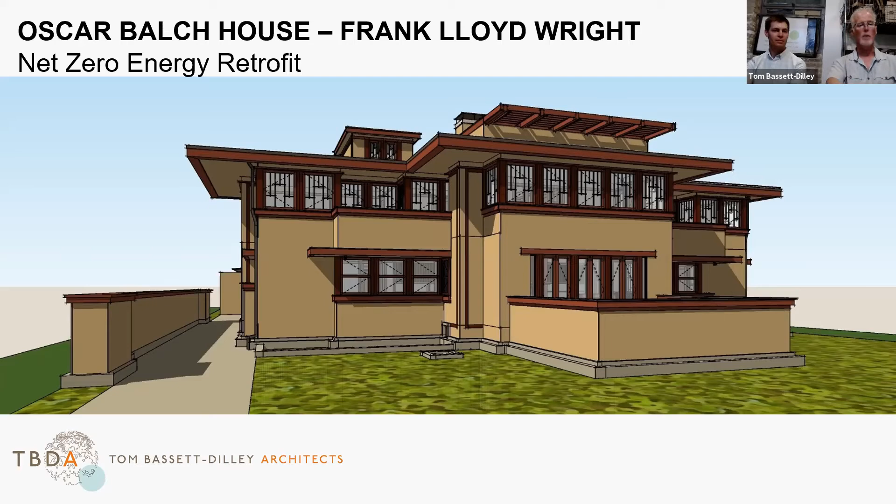We started with existing documentation that we could get from the previous owners, and it was kind of out there in the world. And it's always wonderful to look at the old drawings and see what Frank Lloyd Wright was thinking about, what was drawn. And the house, as you can see, is quite a long house stretched facing the east and west.

So the south that we normally like to stretch to is the short side of the house. And what you're not seeing in this is on that floor plan, the upper right, there's a family room addition that was added in the 2000s. Correct me if I'm wrong there, Doug.

But as we look through the detailed drawings, we can see there's no insulation. You can see that overhang detail on the right-hand drawing. The top left corner of the right-hand drawing is the roof overhang. There's basically a thermal bridge and an airtightness problem drawn into the working drawings. And so, these were not that uncommon. They didn't have capillary breaks. They didn't have dense packed cellulose insulation or spray foam, et cetera.

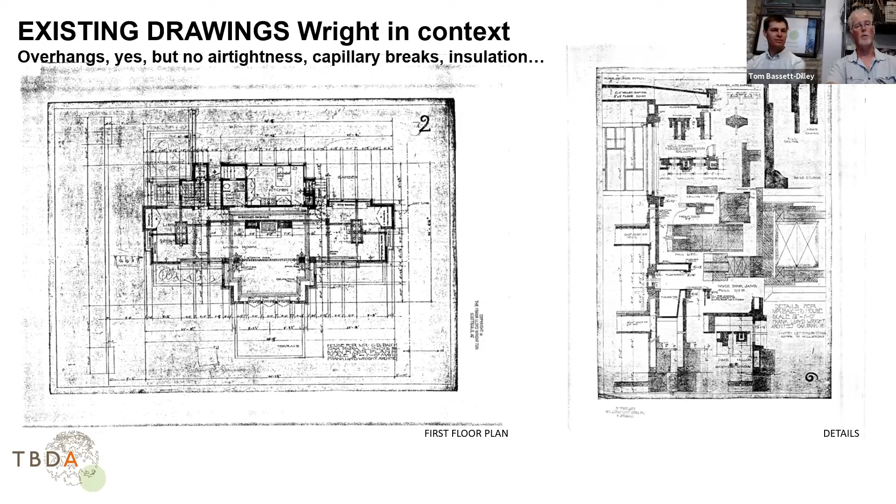So this is what we're inheriting. And we have to think about how we're going to handle that and handle it in a way that the building will be left better when we're done, not worse. So when we look at historic preservation, the backbone to that, or the starting point, is the Secretary of the Interior Standards for Rehabilitation. There's a screenshot here. They have an illustrated guideline.

And the fundamental principles are keep all the original material. You can't say, oh, I'll just throw that thing out and replace it with something that looks the same. We really want to keep the actual original material. And sometimes we can and sometimes we can't. But if you can't keep it, you need to replace it in kind. So if you're tearing off a plaster ceiling, replace it with a plaster ceiling. Don't replace it with 5/8 drywall and just paint it.

The other principle is reversibility, so that if somebody comes in and says, I really want to turn this into a museum and have it be just what was originally here, then the things that we did should be able to be removed without damaging what was there.

The interior and exterior purview actually should be a bullet point on the next thing, which is the tax assessment freeze. So we're pursuing a tax assessment freeze on this project, which means that the tax assessment level is going to be held at the pre-renovation value of the house for 10 years, and then it ramps up for 2 more years after that, if you spend at least 25% of the project's market value, which we're definitely doing. So those are sort of the preservation backgrounds.

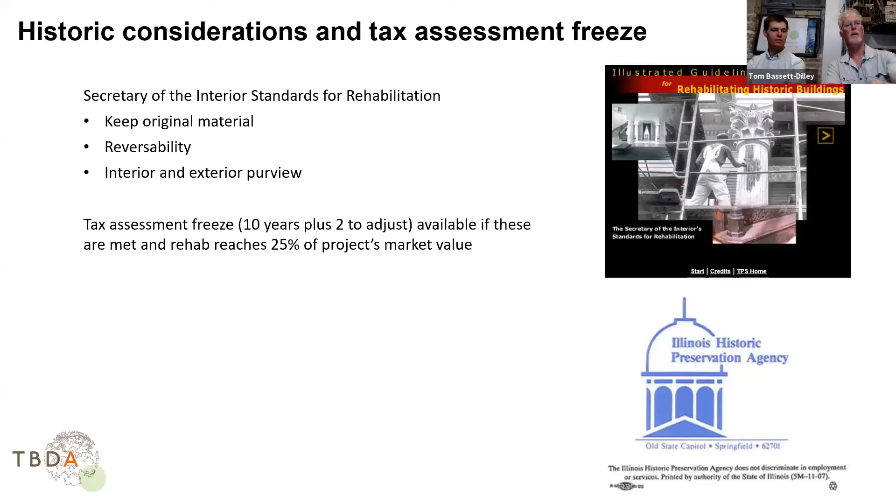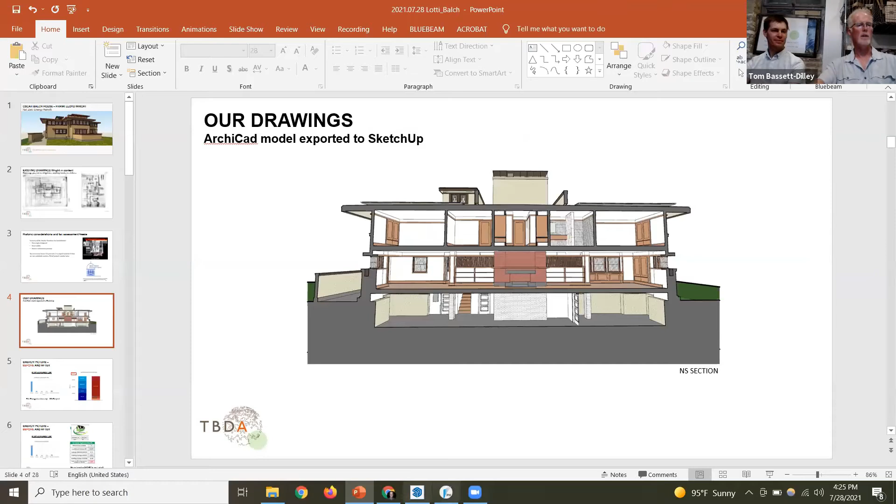We always start renovation projects with as-built drawings, and so this was like the best as-built exercise to date. It was just so much fun as an architect to go in and just have a good look. I'm going to show you this model. If anybody can't see my SketchUp model, Ashley or somebody, let me know. We draw in Archicad, which is a building information modeling program. And since we can't walk through the house, I can give you a little bit of a walkthrough here and let you see the after that we're going to get to in a couple of years.

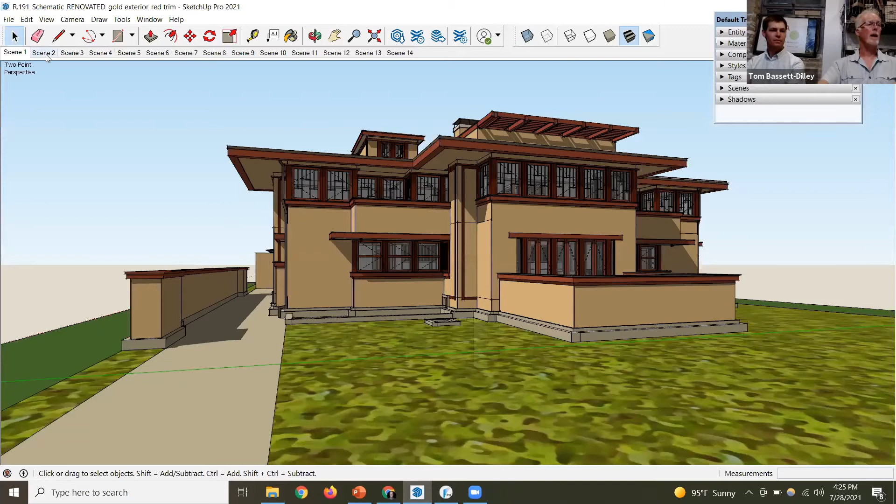You can see we're putting solar on the roof, and as you can see, it's completely not visible from the street. And so that's our renewable energy source. We'll talk more about that later. The front door is a back door on the Balch House. It's this door underneath the overhang here at the back.

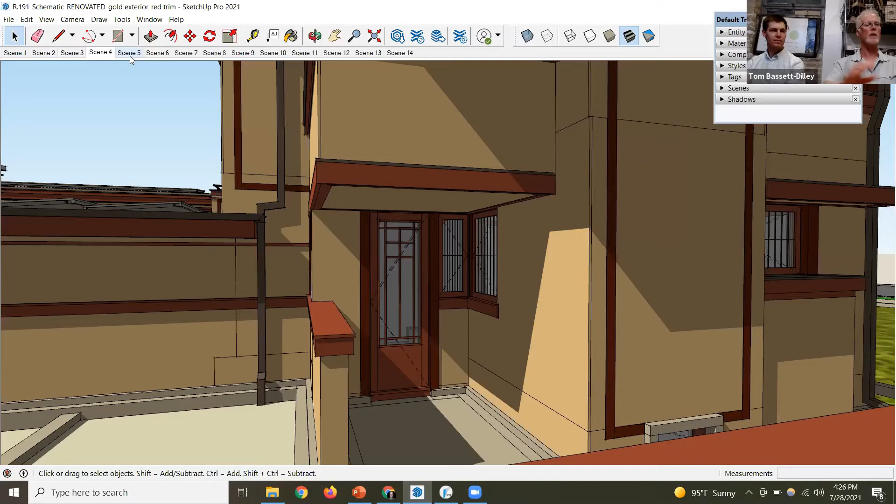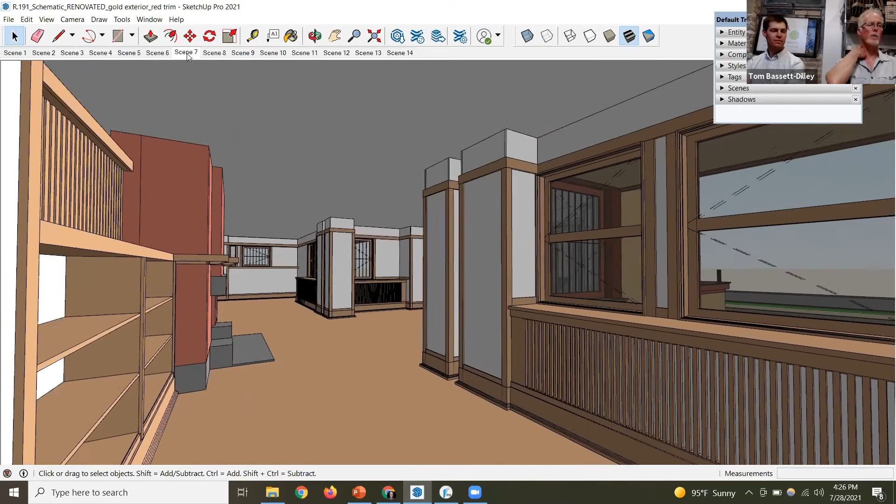It's one of the classic Wright experiences where he choreographs this experience where you have to come in through a mysterious passageway and enter behind the hearth or adjacent to the hearth, which is the heart of the home. It's the anchor, and it's going to be an experience getting there. Oops, I jumped a scene. Sorry. So here we are in this little compressed entryway, and then we come up into the house, and here we are. So this is the big space facing east, and it's a great room, and it's a connected sort of library at our back.

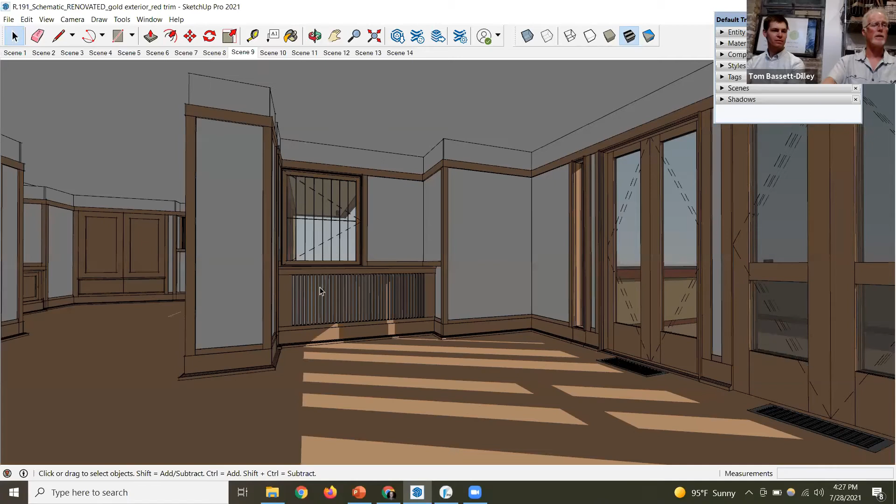Living room is the alcove off to the right, and in the front to the end is the dining room. Now, one of the things I want to point out, because it's going to become important as we talk about our strategy here for retrofit, is, I'm just going to orbit around here, these radiators that you can see underneath this window, the grills underneath the patio doors, the big radiator here. Heating, and in our case, it's also going to be cooling, is integral to the architecture, okay?

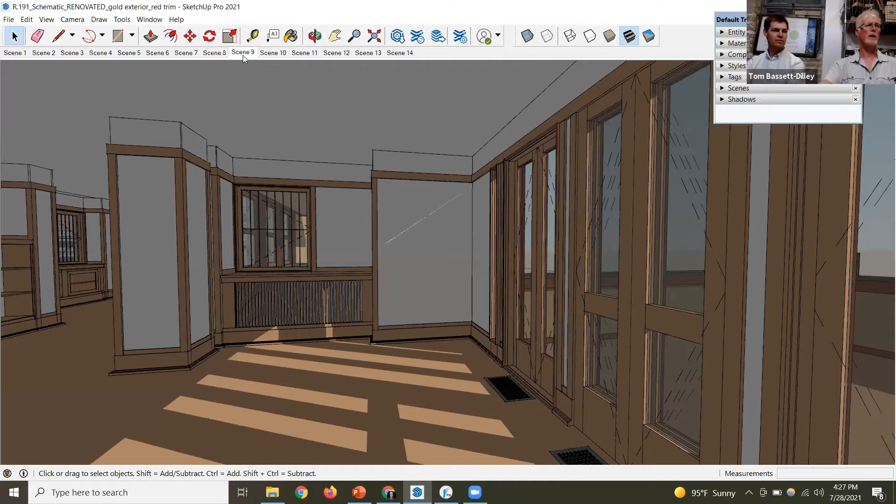And this is something that Wright was, as Samantha said, phenomenally good at. And there's a book that I'm going to recommend later that talks about how he embraced technology and thought about it. And so obviously we have different technology now, but we want to honor his approach as much as we can. I'm going to go up through the floor into the primary bedroom suite.

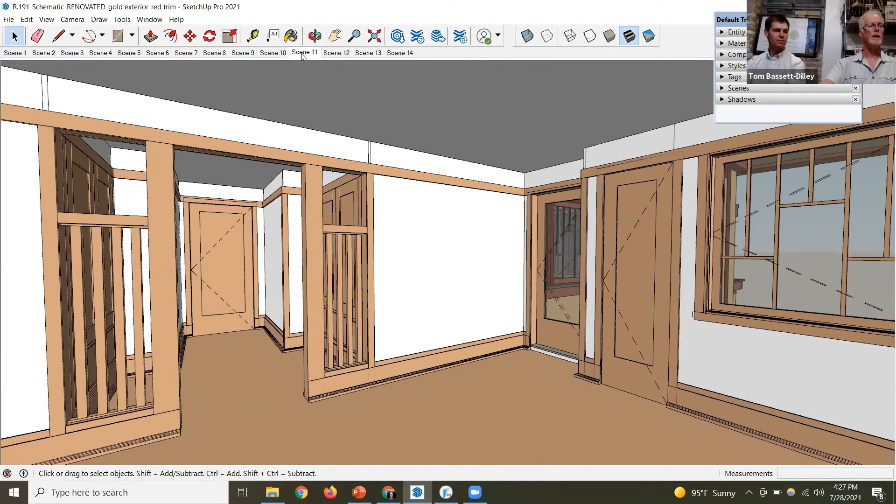Here we are. This has a bank of windows to the east, which are wonderful for view, but Samantha can tell you what it was like during polar vortex with the bed under those windows. Well, how warm could you get the house that winter, Samantha? Was it like 50 something? Yeah, it was 55 was the warmest I could get it during the polar vortex. Yeah. So we're talking about trying to improve the quality of life here by this work we're doing.

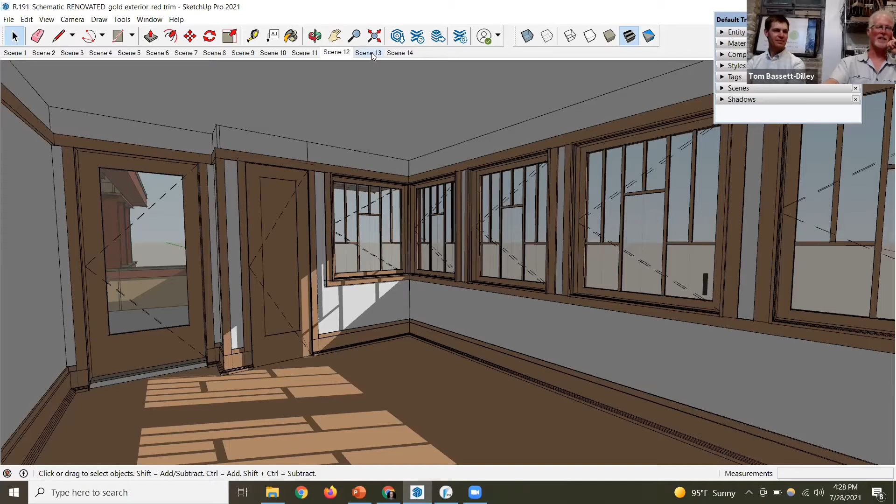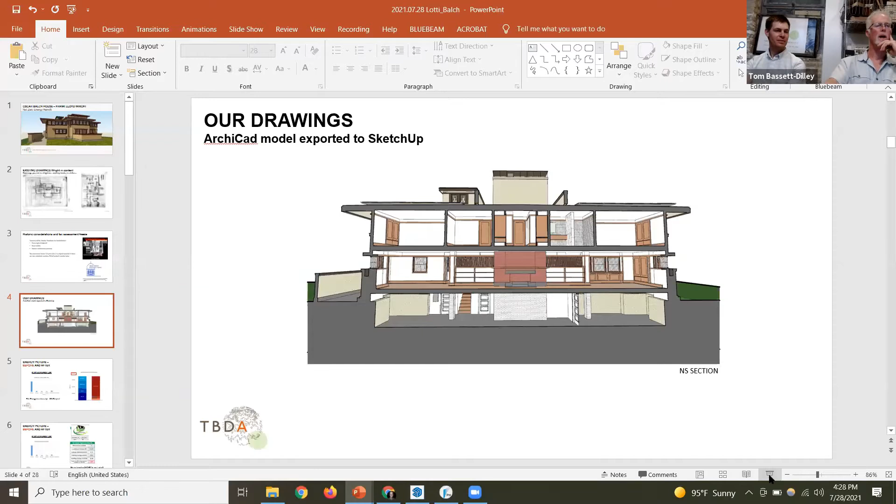So anyway, there's a little tour, digital tour. We can come back to that if we need to. Yeah, so that's kind of our starting point, so that we can start to think about how we're going to attack this from an energy standpoint. And so Mark did an energy model specifically for his thermal demands, especially for sizing the geosystem. And we do one in the same program that we use to do our passive house certification, WUFI Passive, which looks at everything. It looks at electrical, lighting, space cooling, space heating, air tightness, and it all puts it into a program and gives us our energy balance.

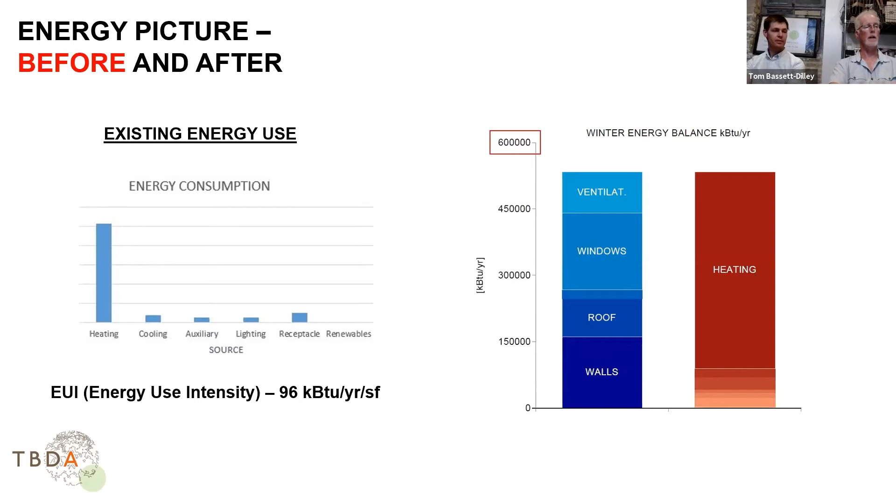So you can see here on the right, the energy balance is like, here's how much heating we need to offset what we're losing through walls, roof, windows, and ventilation in the winter. And in this case, ventilation is just a leaky house. And what you see here is what we see in all of the old houses that are not well insulated, which is that most of the energy is what you're seeing on the left-hand graph. Almost all of the energy is going to heating this building. So what are we going to do? Well, we want to insulate and make it airtight, and that'll make it more comfortable and make the heating system a lot smaller.

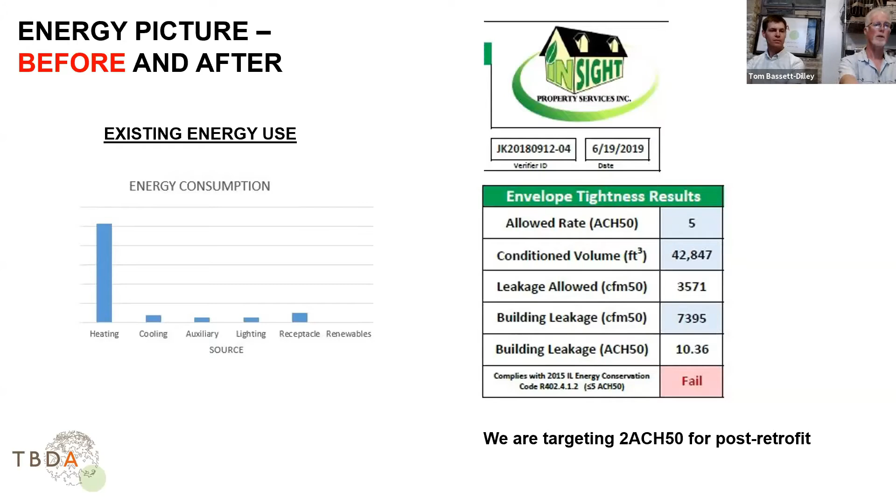We did start with the preliminary blower door. Joe Konopacki came out from Insight and found that we were about 10 air changes per hour when the building was pressurized to 50 pascals, which is a sort of building standard. Passive houses, we want that to be like 1 or below, so 10 times less leaky. And we know that we're not going to get to a passive house level here. We're shooting for 2. If we can get there, that'll be great. If we make it to 3, it's still going to be okay, but we definitely want to prioritize air tightness because it has a lot to do with durability.

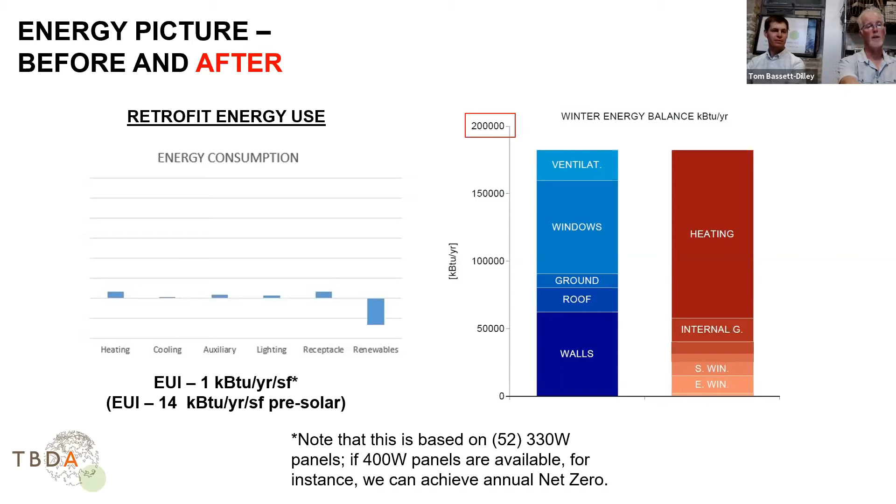Now, when we did our model, we were looking at being able to get 52 PV panels on the roof at 330 watts per panel. Now that watt rating is changing. And if we can get 400 watt panels by the time we put them on in a year or so, we'll easily be at net zero. Right now, we're almost at net zero. We're at an EUI, which is energy use intensity, of 1. A net zero building is EUI of 0. And so we're coming from 96 down to 1, which is a pretty good factor. But we want to go from 96 to 0. And we can get there either soon or in the future.

Well, how do we get there? As I kind of alluded to, step 1 is conservation. Stop the waste. And that is so basic and simple. It's insulation and air sealing and making it as continuous and thorough as possible. So foundation, walls, roof, windows, we want to address it all. That's step 1. Step 2 then is once you've eliminated a lot of your losses, you go to looking at efficient systems. So get an efficient mechanical system for heating and cooling and domestic hot water. Those are the biggies. And then get efficient with your appliances. Swap out your gas cooktop and dryer for electric units, induction cooktop and a heat pump condensing dryer.

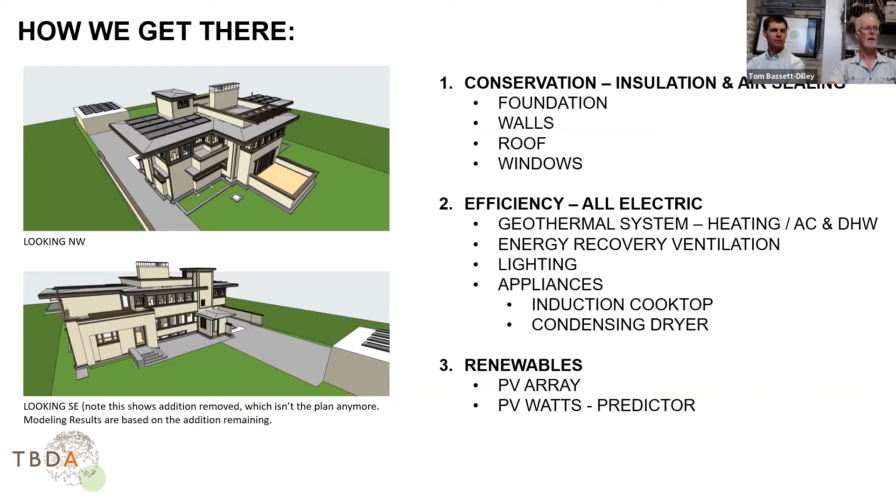And then you've got your energy balance, your energy diet, and then you put on solar to offset it. So that's the steps. Sounds simple. How did we do it? So I want to kind of walk through the retrofit assemblies, and when we get to the mechanical, we'll get Mark talking more about his strategies here.

So this is our foundation condition. It's a rubble wall foundation, big thick wall, and as I said, there are no capillary breaks in early 1900s construction. And what is a capillary break? Well, it's a film, like a waterproof membrane or a sheet of plastic, that keeps the moisture from the earth from wicking into the building. We use those all the time now, vapor barriers underneath the slab, but back in 1911, they didn't have them. So what we've got is moisture coming up into the building, and we've got to think about that in addition to the heat loss.

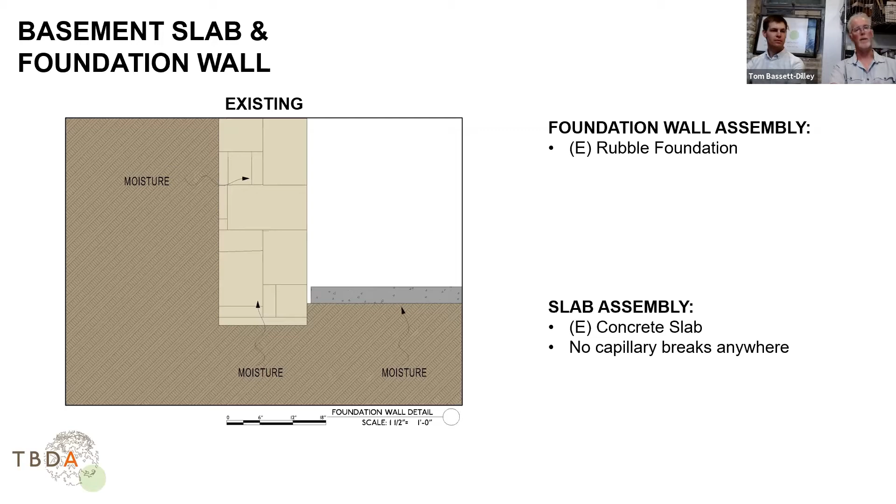So our plan for the basement is to take out the slab, get some EPS insulation underneath that slab. That's a white styrofoam. Get a vapor barrier on top of it and put a new slab down. And Denny pointed out, as we were previewing it today, that we should be showing a little thermal break between that slab and the foundation wall. We don't want to touch warm slab to cold wall. So that will be going in. When we do that, we can put a new perimeter drain to the interior, take it to a sump, make sure that things remain dry.

Moving up from the slab, we put a dimpled membrane against that kind of wavy wall. On a building where we're not being so concerned about historic, we might just spray foam that. If you look at Building Science Corporation, what Joe Lstiburek did in his old house where he had rubble wall, he just sprayed it with spray foam. It acts as a capillary break and a thermal break, and it can sit over the wavy surface, not a problem. But that's not reversible so much. So we wanted to do something here that could be reversible.

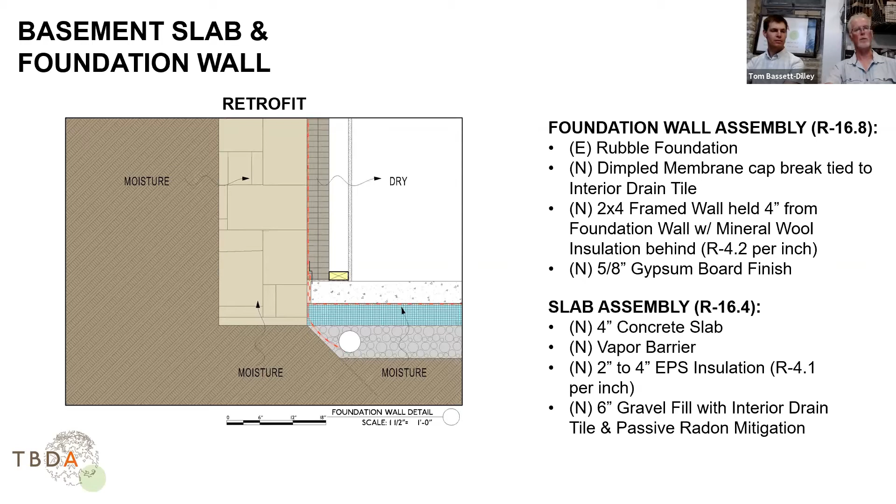So we want to put up the dimpled membrane so that any moisture that does come in can just go down to the perimeter drain, and then put mineral wool batts up against that. So mineral wool can flex a little bit and take the irregularity. We're going to stand a stud wall in front of that, and we can drywall it. So the moisture will be kept out of the building, and we'll have a decent R value. We're cutting down the heat loss through the floor and the walls. So greater comfort as well, even though it's not really a finished basement.

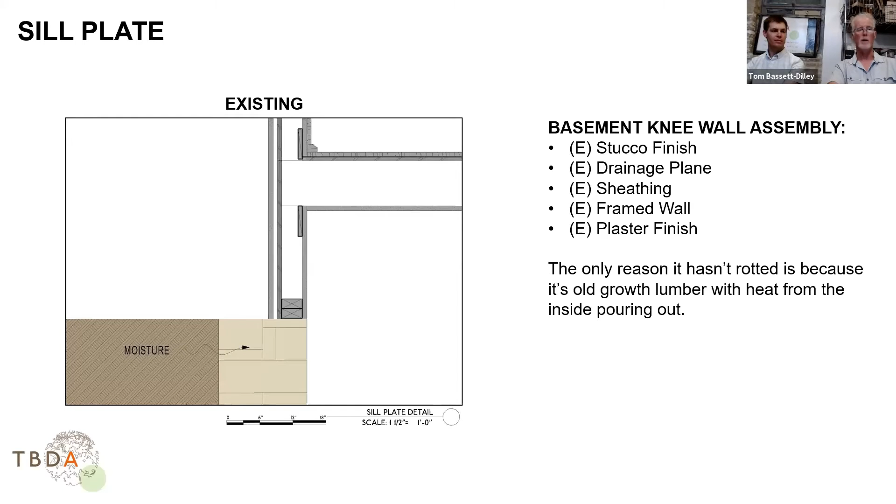Now, when you get to the top of that wall, they just set the studs on the rubble wall. And so moisture that wicks into that foundation just wicks up into the old wood. Well, good news is the old wood was tremendously good quality old growth lumber. And the other thing that was happening in this house over the 110 years is that since it didn't have insulation, you're just pumping heat through the envelope to dry everything out. So this is the conundrum with retrofitting an old building: it's really a wonderful way to preserve a building by just not insulating it, just throwing heat at it, but we can't do that to the environment. So when we start to cool down the exterior surfaces by insulating them, we have to be careful not to let the moisture wreak havoc.

So here, Doug came up with a really ingenious solution that we could remove the existing sill plate in portions, so we don't have to jack up the whole building, and let that dimpled membrane come up and lap over the top of the wall. Well, we actually use a moisture-proof tape there as a capillary break, go underneath the sill plate, which would be a treated sill plate, and then just reconnect the studs to that. So that's our way of keeping the moisture out of the frame.

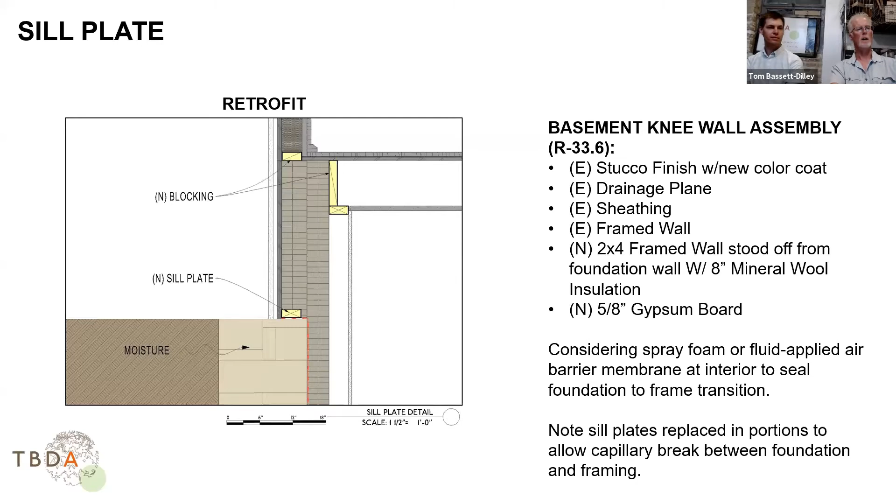So that's coming up down the road. We talked about spray foam here as a way of kind of sealing the rim joist area, which is always a little tricky, and the sort of top of wall. We may think about doing that. It may be the right thing to do. So we have yet to really lock that in, but right now that's not our plan.

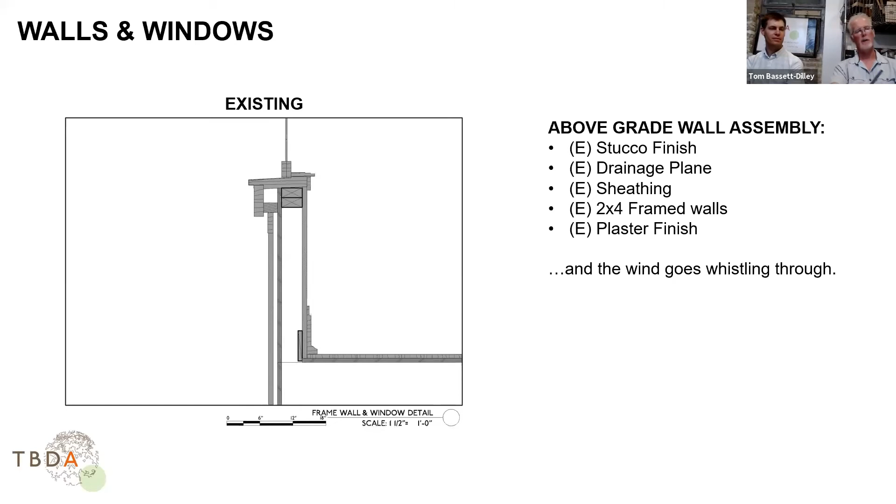Okay, the above grade wall is basically 2x4s with plaster on the inside and stucco on the outside. Single glazed windows. I mean, this is as thin of an assembly as you'll ever want to see in this climate. Well, you don't want to see that in this climate. Nowadays we do 2x6 full of insulation plus outboard insulation. So how do we address this? Well, we want to make it more airtight. We want to insulate it some.

And this is where thinking about the preservation issues and kind of leveraging Doug's expertise really came in. We discovered in looking at some old pieces of plaster on the house that the original stucco actually had a kind of golden finish. And then as we started digging on some of the trims, we found that there was this beautiful red color. So Samantha was all for it. She's like, yeah, great, let's go for it.

And so we said, all right, we're going to recoat the stucco on the outside. So therefore, let's go ahead and take the opportunity to drill holes in the stud bays so we can pump cellulose into the walls and we can get some insulation in there. And then when we patch them and recoat, you won't know that we messed with it.

And that way we don't have to mess with all the interior, because we weren't planning to mess with the plaster finish. So that gives us, you know, a modest R13, but it's a heck of a lot better than a really modest R0. So it'll slow down airflow. It'll give us insulation. It'll help with acoustic control as well.

So the other part of this, of course, is the windows. When we got to the site, we could see, like in that master bedroom, so much condensation on the inside of those single glazed windows just coming down. It was ruining the sills. The sills were becoming destroyed by this moisture, which you couldn't keep out of the house. There's moisture inside the house. It's going to condense on cold glass, and it's going to wreak havoc on your interior finishes. So we knew we needed to get improvement in the windows.

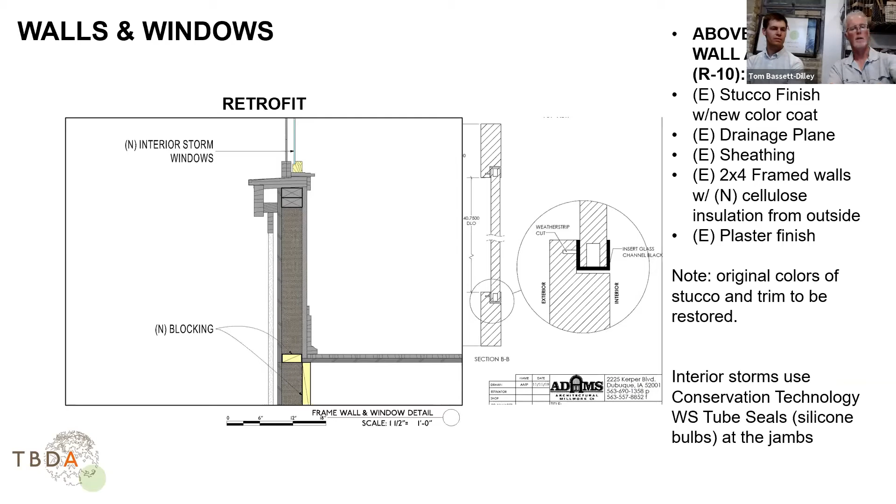We looked at exterior storms, we looked at interior storms, and ultimately we settled on interior storms so that we could let the original art glass read from the outside. Yes, those windows will continue to weather, but we'll have to just keep improving or repairing them as we need to. So we worked with Adams Architectural Millwork. They're an Iowa company, and they make custom storms, and they're terrific. And then Doug's guys, Tom Wilder, the carpenter, just knocked it out of the park.

And then there wasn't a lot of rabbet, R-A-B-B-E-T, the depth of jamb to receive the hinge. So Doug and Tom had to think about mortising those in. But then that silicone gasket really helps us get the airtightness.

Now, one thing that we've really been monitoring is condensation can still happen. There are certain environmental situations where the humidity is really high and the dew point is kind of high, but it's cold outside. So Samantha, would you say that it happens 2 or 3 times seasonally? I mean, we haven't had these on very often, but there's been a little bit, and it kind of goes away fast. There's not been as much as before.

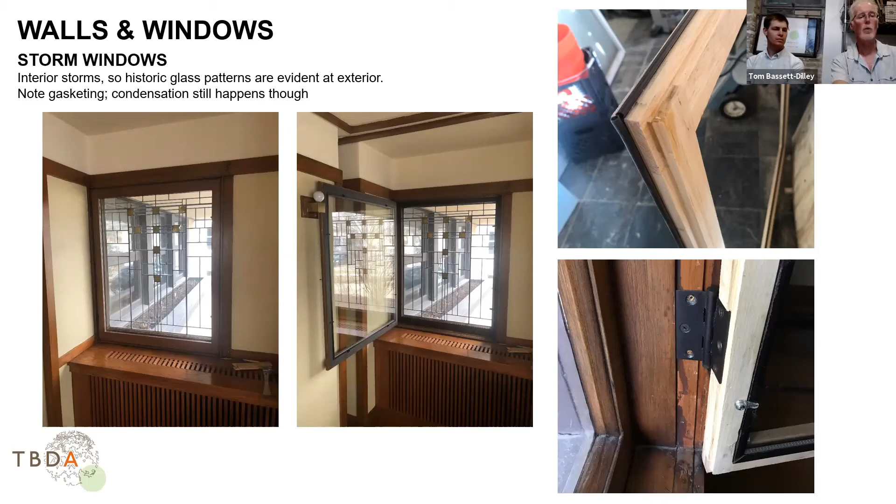So it's mostly at the change of the seasons, and it is mostly on the windows that get direct sunlight. For example, the east windows in the master bedroom will have condensation when we're passing from, I guess, winter to summer this time. Yeah, the spring is typically one of our most difficult seasons moisture-wise. So on balance, it's a heck of a lot less, and you can always crack the window open and release the condensation. You're not going to get as much energy savings, but at least we have that option there. So that's the storms, and it made a difference with comfort, didn't it?

It made a huge difference. I now can sleep up there just fine.

There's no insulation. So the house has a really extreme version of the stack effect, where stack effect is basically like a chimney, the warm air rises. And so if you give it a place to get out at the top, it'll just rise and head on out. And then the whole house is like a chimney. It's just turning over air constantly.

And that's really tough on your interior finishes, because what you're doing is you're sucking in dry winter air and then you're heating it, which makes it even drier, and you just get parched on the inside. So usually the first thing you want to do is try to get a good lid on the building. In other words, you want to air seal and insulate the top, and then take care of the bottom so you don't have the intake.

And then those are the farthest parts of the pressure plane, if you think of it that way: neutral pressure in the middle, and high and low pressure top and bottom. So that kind of stops the building acting like a chimney, and it contains the air on the inside, which you might be thinking, okay, boy, contained air sounds stale. And it can be stale, and that's why you need ventilation.

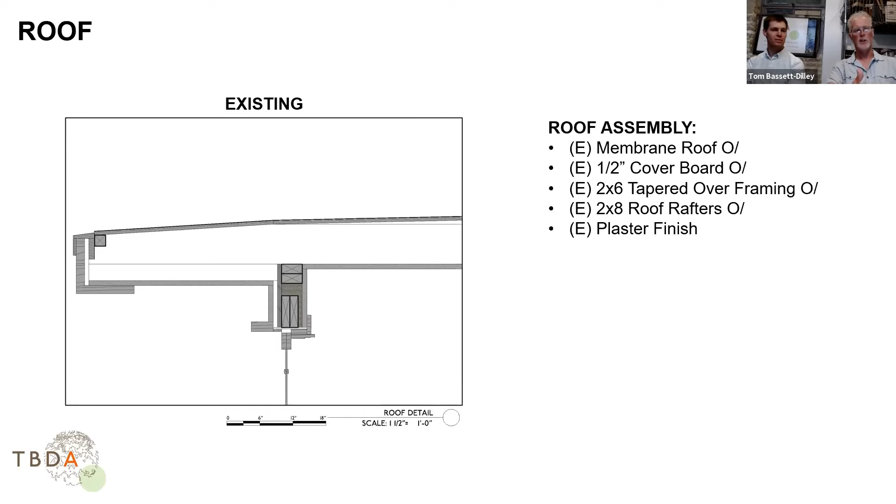We were thinking, are we going to insulate this roof from the top? In other words, drill holes in and somehow get the insulation in and avoid these interior finishes? Or are we going to take down these ceilings, insulate from the bottom, and then put the new ceilings back? And that's ultimately what we wound up doing. It was a significant amount of work, and we had to be very careful with dust and all that stuff.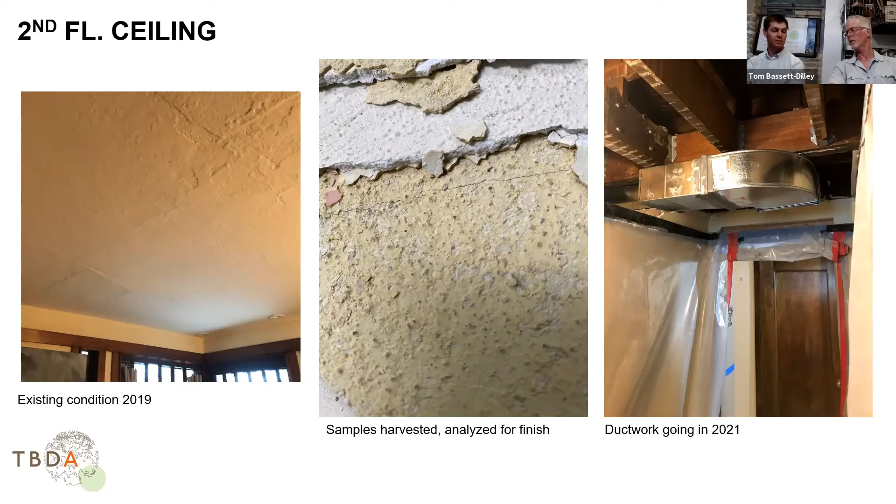But it allows us to get the ductwork working. It just allowed us to solve all the problems, basically. So the photo on the right then is the ductwork going in. That was just like a couple of weeks ago, right? Mm-hmm. Yeah, 2 weeks. Yeah, so that's the master vestibule. We'll get there in just a second.

So here's the retrofit. So what we need to do as we control the air tightness and the thermal control up at the top of the house is we got to think about being safe with condensation. Now, we like to avoid spray foam from the standpoint that it's a high embodied energy product, and embodied energy is super important to think about, but we need to air seal the top of this house.

When I was at Taliesin, I spent a year at Taliesin, the Frank Lloyd Wright School of Architecture, and I remember once looking at a drawing of one of his Usonian houses from the 1950s, like the original. It was just so fun to see these drawings. And there was a note. It said, all roofs should be absolutely flat, dead level.

And I was like, oh my God, I can't believe they actually said that, because it's such a no-no, because eventually it's going to pond and you're going to leak. So anyway, we need to control condensation. That means that we either need to get enough rigid insulation above the existing roof deck, or we need to spray foam on the underside of the roof deck with closed cell foam so that air can't get there and condense on the decking, or a combination of the two.

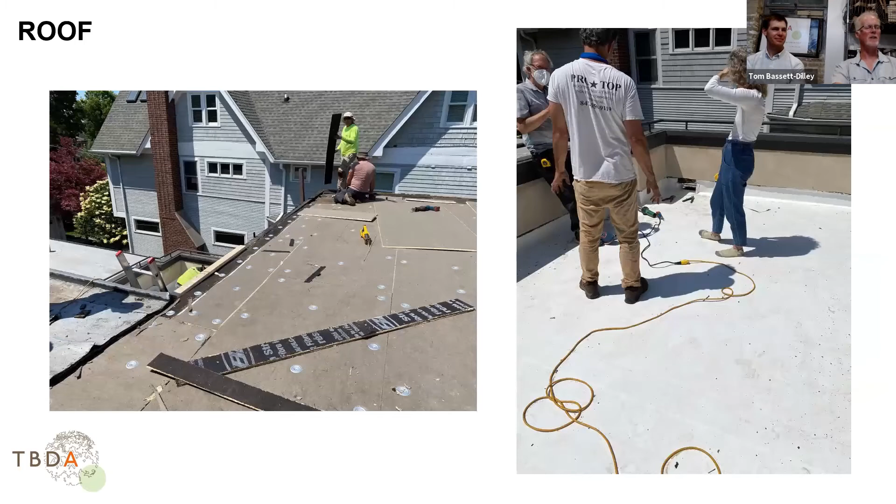So we get a whole bunch of insulation, but we've definitely controlled the condensation at the top first. And then we get our historically accurate plaster ceilings back up, and we are golden. Right, guys? Here's the roof going in. You can see that's the polyiso on top of the old. The new roofing material is blinding white. There's Samantha being blinded with Doug and Scott from ProTop, great roofer. And this is out on the roof deck, the second floor. That's roof. All right, let's talk mechanical systems.

Mark, do you want to just kind of describe? Well, you haven't really seen everything here, so I just want to tell you. Sorry, guys, I got a preview, Mark. We're coordinating here. I showed up late.

Sorry. We have a first floor plan to show kind of what comes up from the basement, and we have a second floor plan to show how we're ducting up there. So I can forward to those as we go, but generally we're looking at a ground source system. So would you like to kind of describe that, Mark? Sure. So one of the things we want to do is keep the radiators live and active so that we can keep the exterior wall warm and keep the way that the house was heated before kind of the same. It's an experience. Radiant heat is an experience.

But geothermal or ground source heat pumps don't do a real good job of producing hot water with the conventional equipment. And so we have a two-tier system. We use a standard water-to-water unit that's capable of producing 120 degrees for mild weather, which is fine. And then when we need warmer water, we use an R134 unit, which will give me 160 degree water. So we're going to circulate that on a temperature reset schedule to produce the hot water for the radiators.

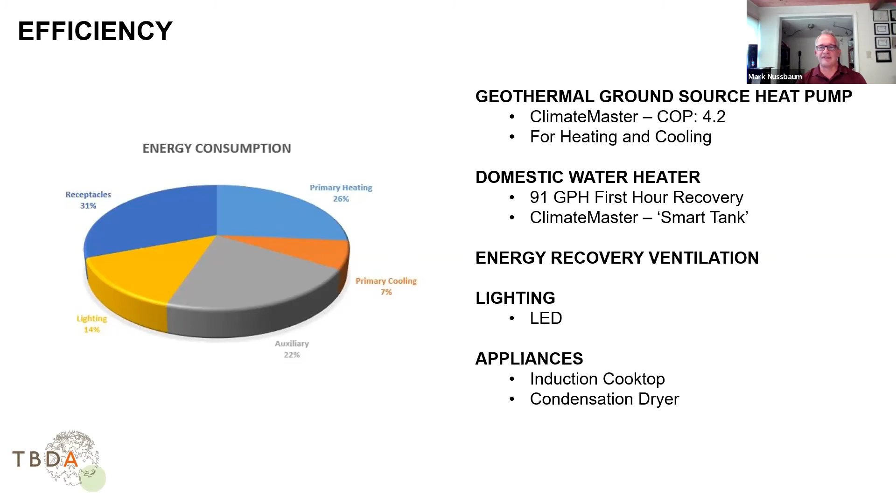The two end rooms on the north and the south, there was no easy way to get ductwork to them, so we have zones off of the first floor unit that come up on either end in some niches so they'll be concealed, and then will blow out into the rooms from the north and the south.

We also have an energy recovery ventilator serving each floor, so we'll use it for our general and our bathroom exhaust, continuous exhaust, and we'll bring in fresh air into the returns on the air handler on the second floor and into the air handlers in the basement for the first floor areas.

Is that good, Tom? Yeah. Oh, it's fantastic. Yeah, thanks.

And I wanted to underline something that you said there, which is pointing back to what I was alluding to earlier. This book by Reyner Banham called The Architecture of the Well-Tempered Environment is really fascinating. He just looks at how architects in the early part of the 20th century especially started thinking about mechanical systems in buildings, like when Carrier came along and invented air conditioning,

and how did Frank Lloyd Wright put in radiant heat, and he really does give Wright a lot of props that he really embraced it and thought about integrating mechanical systems into the architecture. And so the radiator here is part of that. It's really part of the architecture.

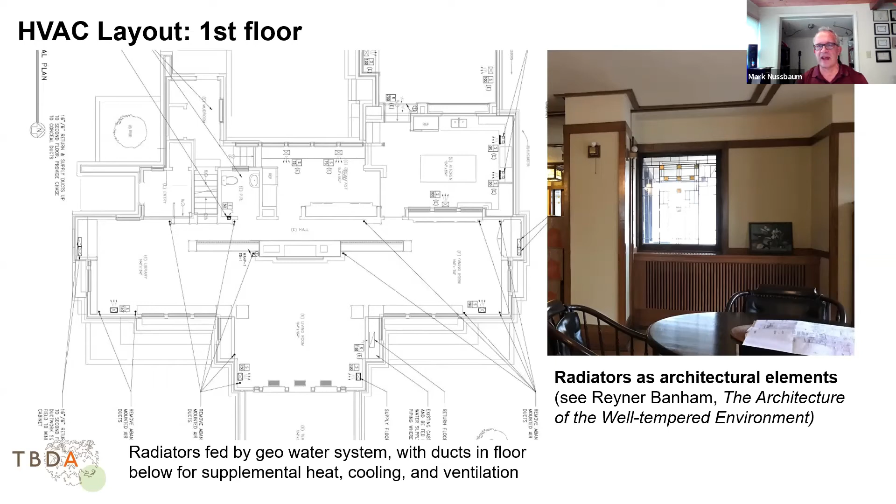Tom, one last thing I forgot to mention. We do have a loop field that's installed in the front yard of the house. That was installed last year, prior to some landscaping efforts that were done. So we have a loop field installed in the front yard. Yeah, that's the mess. But yeah, that will be more than adequate to provide the geo at a very efficient level.

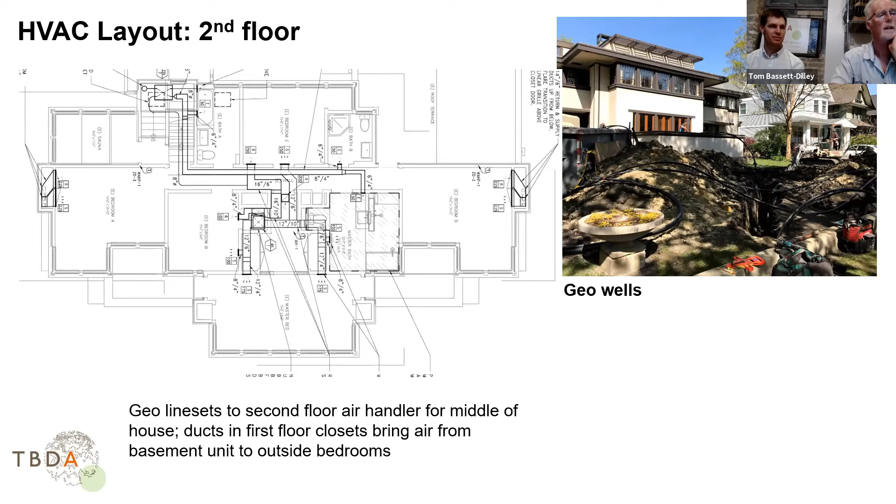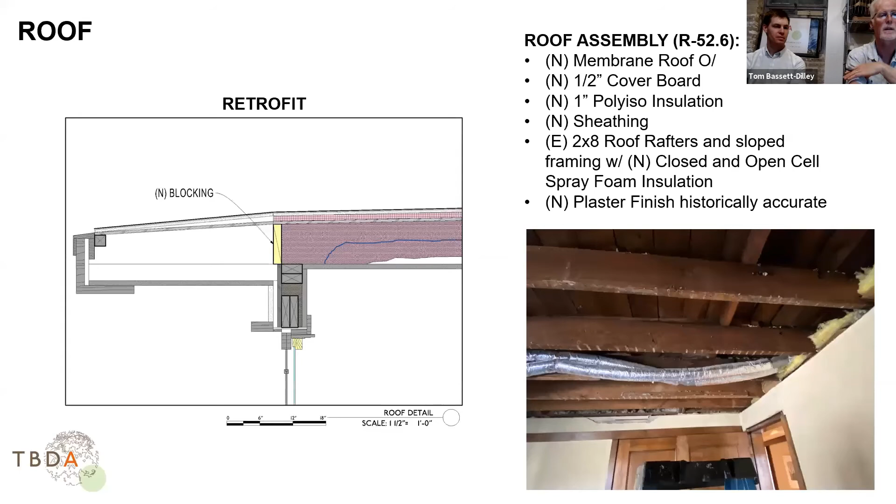And this is replacing a SpacePak system, which you can see in this photo here, that they had installed, free of insulation pretty much in the previous house. So that was trying to do some cooling with the high velocity system, but we're kind of changing the way that works.

So to wrap this up here, what we do in our energy modeling is use the tools that we have. Basically, we get an annual energy diet for the building. And then we look at the NREL website called PVWatts to plug in the size of a system or figure out how many panels we would need at whatever slope to get the amount of output that we need to get to net zero.

So that's not as accurate as the solar vendors. They have better shading modeling and I think more accurate tools, and more experience with that. So this image here on the lower right is from a solar vendor looking at the shading effects on some of these. And so we're coming up with similar numbers,

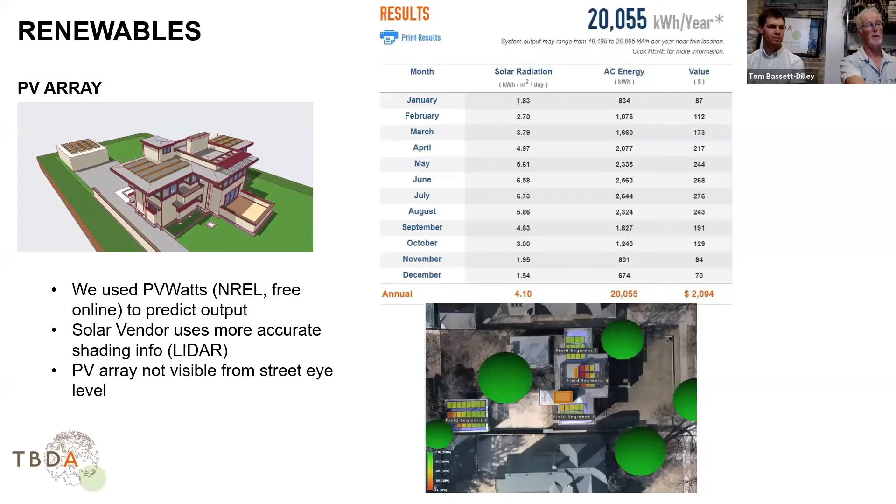and we're very, very close to net zero. Ultimately, this will require monitoring and maybe overshooting a little bit with the solar array. We want to be careful about that. We don't want to overshoot too much, or we can jeopardize the renewable energy credits.

Final thing I just want to say here is putting retrofits in perspective with regard to embodied energy, which is the energy that's contained in making a material. If you're going to make a yard of concrete, how much energy does it take to fire the lime to create cement, to mine the aggregate, to bring the water to the site, et cetera. Concrete is a notoriously high one, a high embodied energy.

So we're trying to use as best we can the tools that are available to assess, and people are getting a lot better at this. I'm not going to say that my numbers here are spot on accurate, but there's an order of magnitude about the way this works that you'll get in a second when I walk through it, because this is our energy model of how much it would be if for the next 30 years we just kept the house the way it is, right? We go from the embodied energy of like 4 million or so kBTUs per square foot up to 14.

Okay, so what if we just do low-hanging fruit? We do easy stuff. We maybe do a little bit of retrofit insulation. We don't deal with the entirety of the roof because that's big and expensive. We don't pull out the slab. We take care of the easier stuff. Well, we can make a sizable dent. If that's all you can do, you should still do it. Don't let the perfect be the enemy of the good. And it takes a very small amount of embodied energy to do that work, especially if you're using cellulose, for instance, which is a carbon negative material.

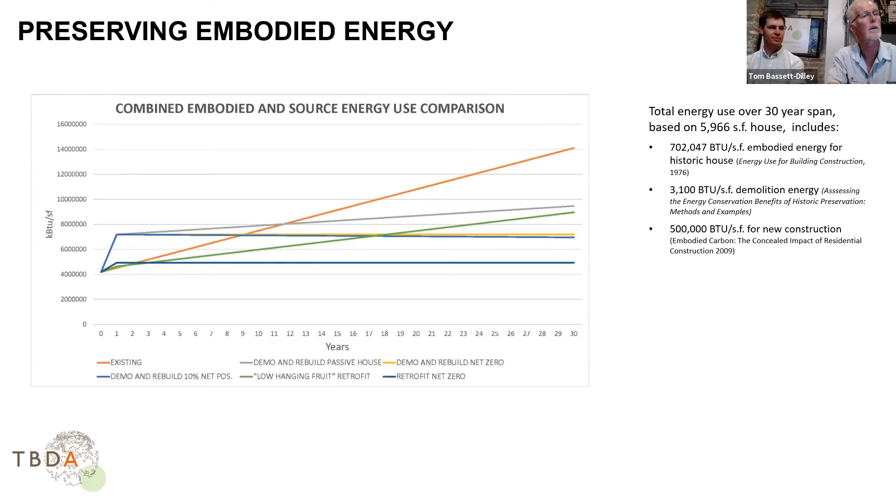Oh wait, my phasing. What? This is the wrong one. I did a save as. Okay. Well, we can talk through it, I guess.

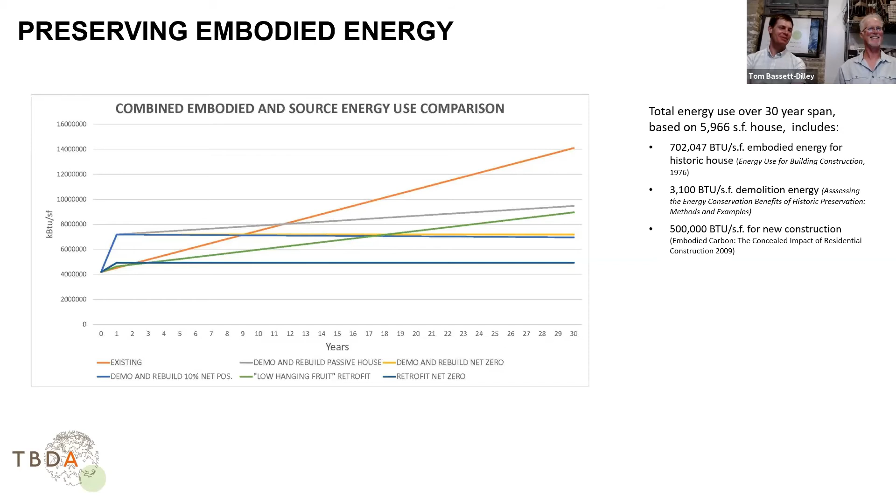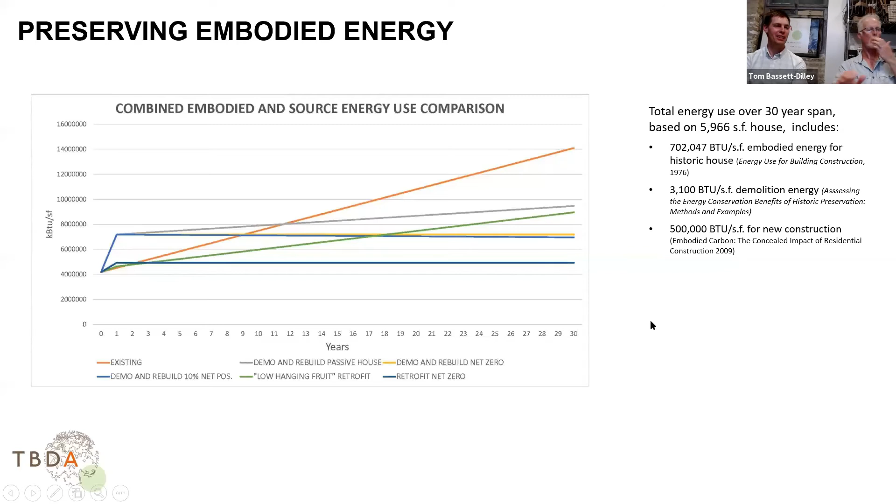So it started off as a 6-year plan. We are doing 2 projects this year which were meant for consecutive years, the HVAC build out and the roof redo. So in doing so, we've effectively chopped a year off of the length that Samantha has to deal with people trouncing through her house every day. Last year was the geothermal wells and the storm windows, this year the roof and mechanical.

Next year will likely be the basement insulation and/or solar, depending on pricing and taking advantage of still high solar credits. And then we're also planning some interior remodel, turning a bedroom into a new bathroom on the 2nd floor, and insulating the wall and doing the stucco work, as Tom mentioned.

So the last 3 years worth of work are still to be debated. We typically meet at the end of the year to determine and finalize projects for the upcoming year. So it will be a battle between wall insulation and solar, and then basement insulation for this next year, I think.